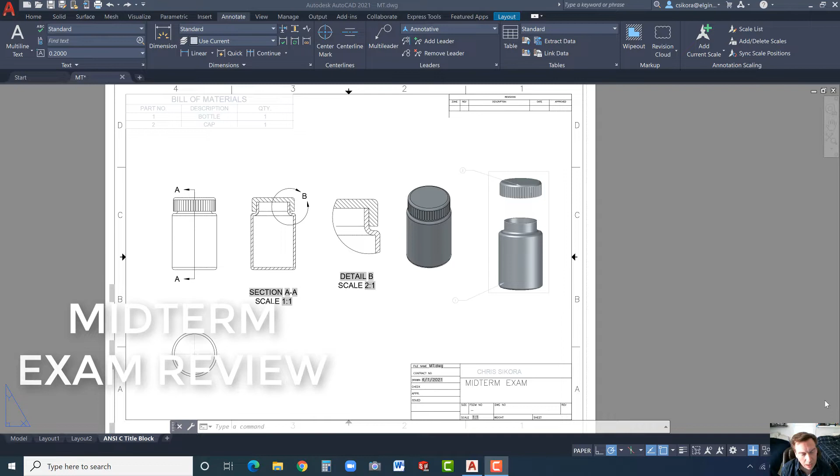So it's a review for the midterm exam. What I ask is that you use it to practice as much as you like, but when you take the exam, don't cheat yourself. Actually do it on your own after perhaps watching this.

This information can be found if you go to Vertanu 1, V-E-R-T-A-N as in Nancy U-X 1, and go to the exams. I would grab the Inventor Basics midterm. There probably will be an AutoCAD midterm up there someday, but for right now you could just use this because it's basically the same thing.

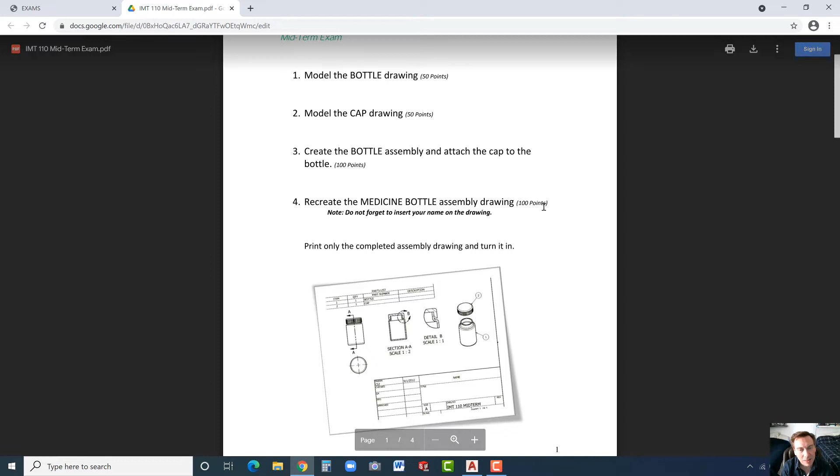There are some instructions, and quite honestly the instructions can still be used because they're very basic, but they do give you the points for each component as well as the part or the assembly and the drawing. And this is our goal ultimately, is to make that drawing, or what you saw earlier.

Now here are the parts. This is not something you have to make a drawing of, but you have to make the part and model it up. So it's a bottle. It's 2.5 inches in height for the bulk of it. The neck is another additional half inch. And it's 2 inches in diameter, and the neck is only 1.5 inches in diameter.

There's going to be some fillets we're going to put on to smooth out the sides, and then we're going to shell it out at 100 thousandths. So 0.1 for the typical fillet, 0.1 for the typical wall.

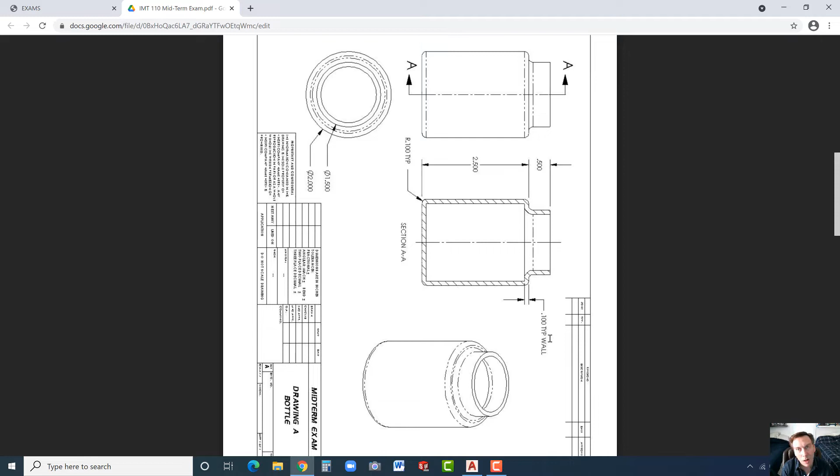The cap is a little more complex. As you can see here, we have a couple stair steps. We're actually going to build it on the bottle to utilize some of the geometry from that, because the neck is the same size as the hole.

Now here we have the neck, or I should say the hole is only going to go 0.4 deep. And then there's this additional 100 thousandths thickness, and then there's a cap on the top of that that's 1.9 in diameter, and it's 0.1 as well.

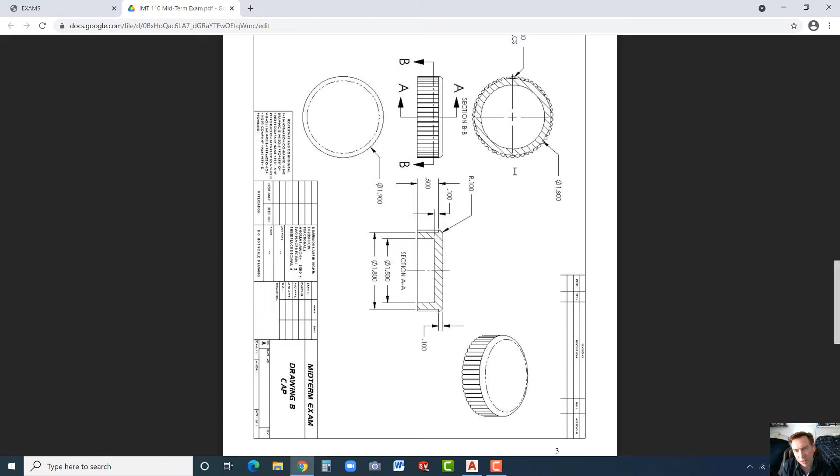And so then we're going to put this array of circular diameters. Let's see here, they're 0.1 diameter. I tried to keep the numbers really easy, so you could just almost do this in your sleep once you've practiced a couple times. And ultimately there's kind of what we want.

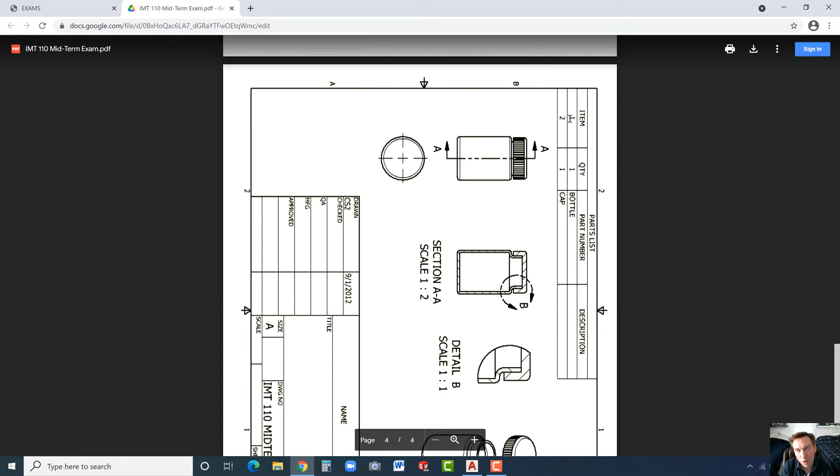We want a front view, bottom view, section view, detail view, isometric view with the balloons and the parts list or bill of materials, whatever we want to call it. And there's going to be a bottle and a cap and so on.

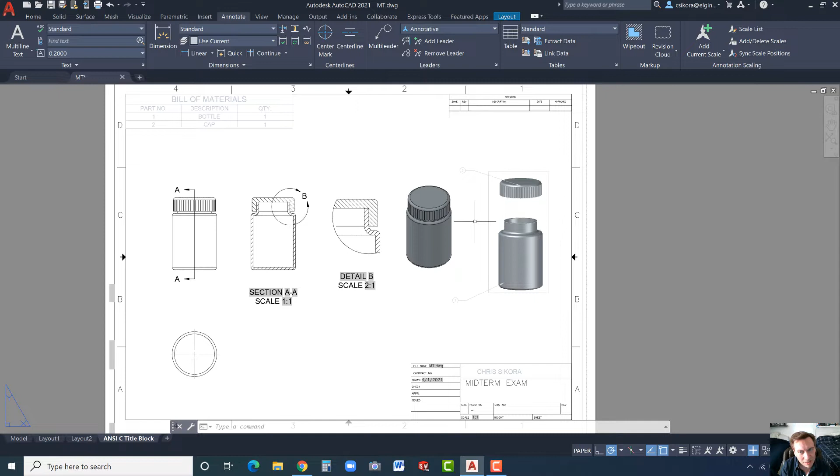Now, the exploded view that you see here is going to be extra credit. You could just bring in this view that I have here if you want. But for 20 points extra credit, I will show you at the very end a technique where you could get this. Now, it's not easy, and that's why I'm giving it extra credit, because I did it a couple times, and several times it came out wrong, and I'm not entirely sure why, but I eventually got it right here, as you can see. So let's begin.

I'm going to start with a new drawing and use the AutoCAD 3D, the one we use all the time, and go to the home button and then top. Now let's proceed. I'd like to actually, once we get home here, go to, I like the 2D wireframe, but it's up to you, whatever you want.

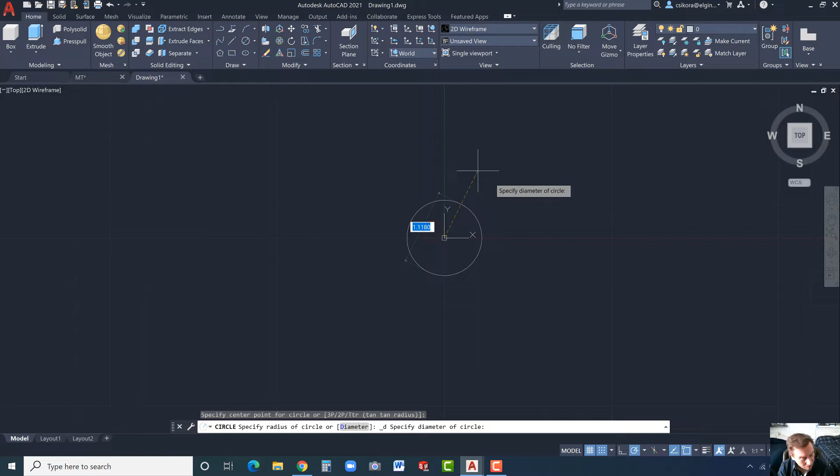Okay, I'm going to turn on the grid snap, and I'm going to proceed to go over here to the center diameter. The bottle we're going to design first, and that's a 2-inch diameter for the main portion of the bottle. So we're going to click on that center point, drag it out, type in 2, hit enter, and then we're going to go back to the home button, and we'll proceed to extrude that.

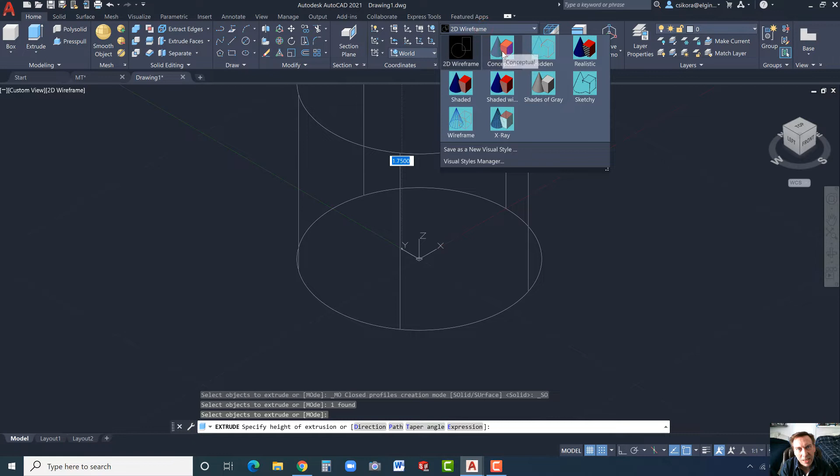So click on extrude, select the geometry, hit enter. It should be able to drag it up. If you like, some of you don't like wireframe, and I get that. I'm going to go with conceptual. Oops, that's making me reset there. Let's go back to extrude. Oh, there we go. Okay, and this should be 2.5.

Zoom up. We could click on this little button right here. That will bring us up closer.

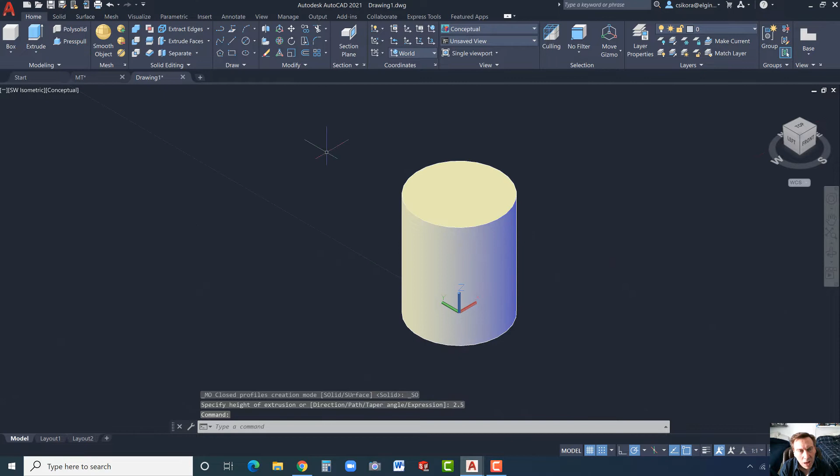Now we're going to go ahead and draw another diameter, centered here on the top. Just click and drag out a circle and make it 1.5. And we could do press pull.

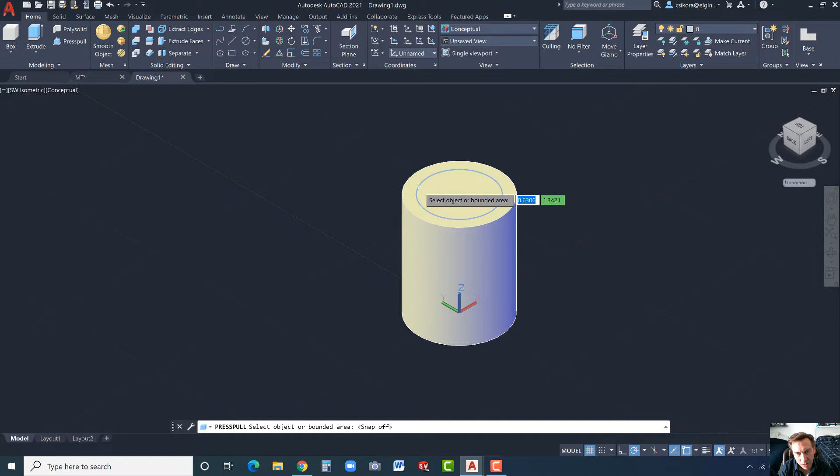Let's go ahead and give it a try. Now I'm going to turn off my snaps. Click inside there, drag it up, and make it 0.5.

Now, one of the advantages that occurs with press pull is that sometimes it could actually merge the two bodies, versus if you use extrude, they're two separate bodies that later have to be united, as we've seen before. In this case, it united them for us automatically, so there was a bit of an advantage for that, to use it that one time.

But I've gotten it where it's not. So just be aware, sometimes if they don't both highlight when you hover over it, it's an indicator that it didn't put them together. It might be due to a sloppy sketch or something, if I've done that before, and I know I have.

All right, now we put the fillets in, and it's very important to do this in order. So fillet edge, radius, and 0.1, enter. Select this edge here.

Select that one there. Now, if you try and click on this edge, it says it can't. That might be because you need to unite this part, and the union is right here. You just click on both of those and click on both of these and hit enter. Then you can try to put the fillet on.

All right, but as you can see, these all worked, and it is important to get these in first. I'm going to hit enter and enter, so enter 2 times, and we have it.

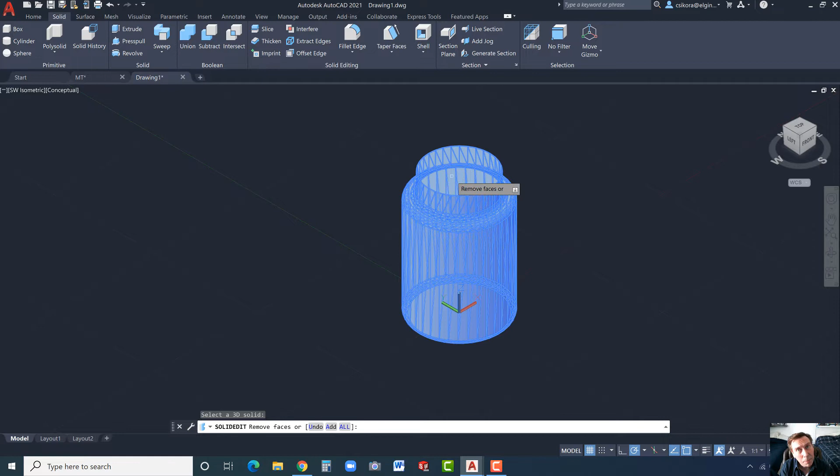Now, the last thing you do is you shell. So go to shell, click on the model, and then click on that top surface, and it should turn white or a different color there. That's the face that's going to be removed.

Hit enter, and now enter 0.1. Enter. And then just hit exit right here, and exit again. All right, there's our bottle. 50 points right there for you.

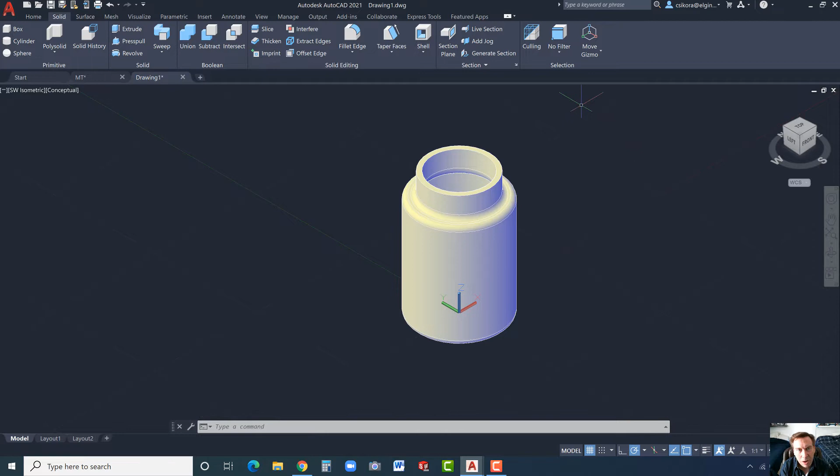Okay, now we're going to move on. Let's go to the home button here, and we're going to proceed to make some different layers. So let's go to layer properties. For an assembly, as we learned with the assemblies exercise, I think that's exercise 5, this is similar to what we did.

Go ahead and click on new up here. We'll call this bottle. And then click on new again. The next one, we'll call it cap, and click on it again. This one is only if you want the extra credit. Put cap 2. All right, and then click off of it.

You can change the colors if you like. It doesn't matter. I'm just going to leave mine all the same. It doesn't really matter to me. Okay, and I'm going to close this.

Now I'm going to select the bottle and place that over here on the bottle layer. Now as I hover over, it'll say, look at that, the color is by layer, and then it says layer is the bottle.

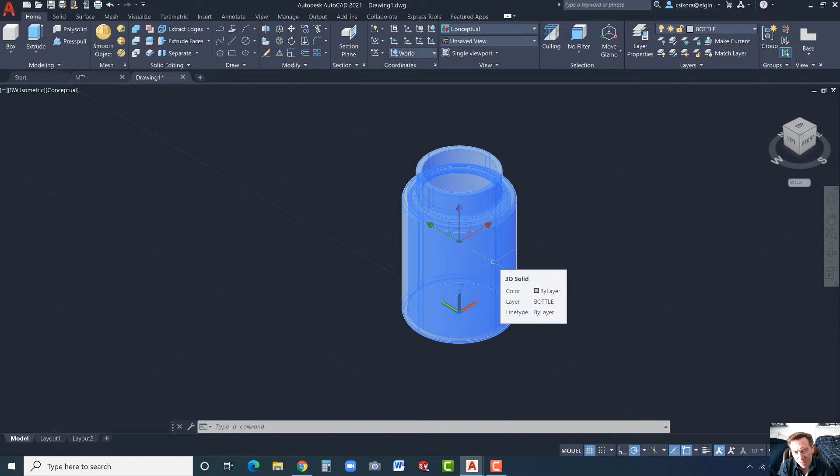Now, what we're going to do next is we're going to go ahead and model the cap. For the cap, we're going to model it literally on the bottle. So what we're going to do here is let's go to the diameter, center diameter, hover over this edge, and we're looking to get the center point. There it is. I had to hover over the edge of the neck of the bottle to get this center point. I'm going to click and drag this out.

Now this first one is going to be 1.8 in diameter. And proceed to extrude that.

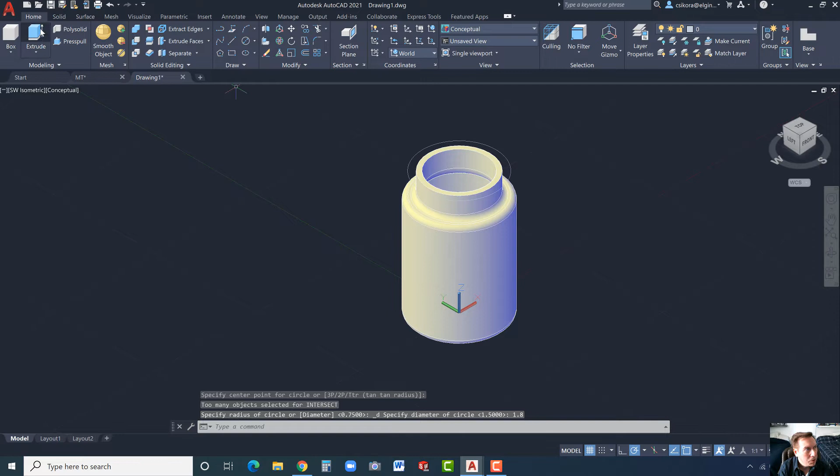Click on it, and notice I picked extrude. I didn't pick press pull because it might actually merge or unite with the bottle, and we want them separate volumes. So anyhow, I went with extrude, hit enter, drag that up, and it's only 0.1 for the height.

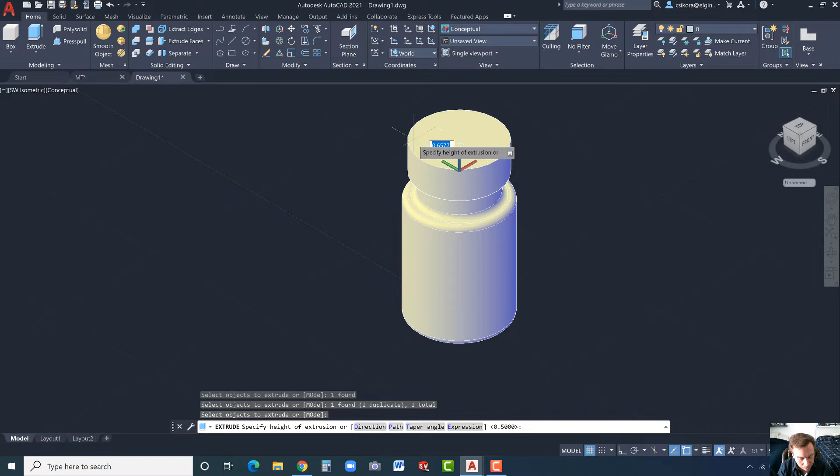Now let's go back to circle, center diameter. Hover over this until you get that top. Let's see... okay, there we go, now we see it appear.

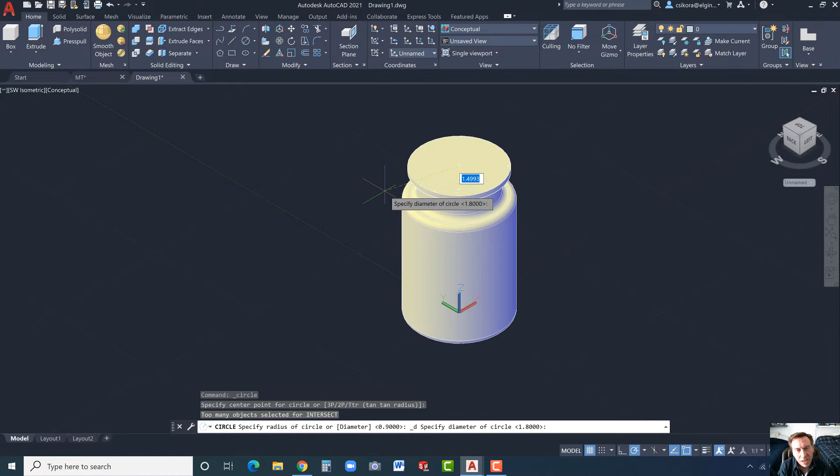Click, drag out another circle, 1.9 this time. I think even if I use press pull, because it overlaps, it comes out as separate. But let's give it a... no, we better go with extrude, I just thought it might confuse some of you. So let's go with extrude and select that outer edge, hit enter, and this is 0.1 for the height.

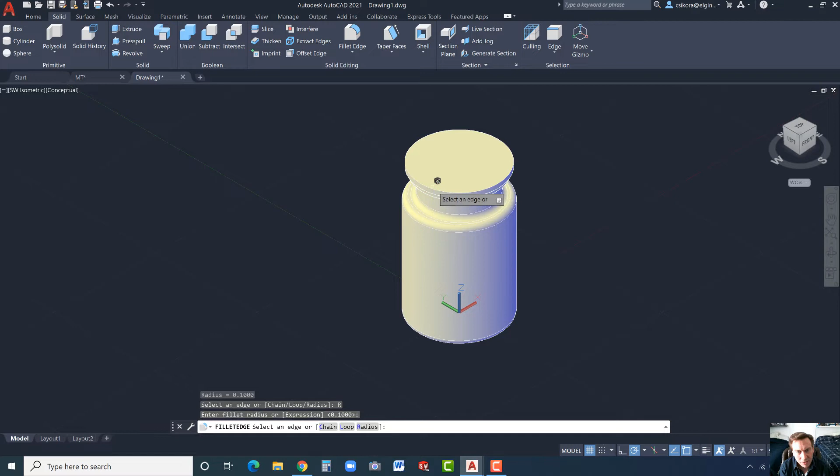Now immediately I would recommend to put the fillet on. The number one thing on this test that's missed is the fillet, so that's 20 points if you miss it. Make sure you add it: go to fillet, go to radius, it's already 0.1 so we're in good shape. Hit enter, select that edge, and hit enter, enter.

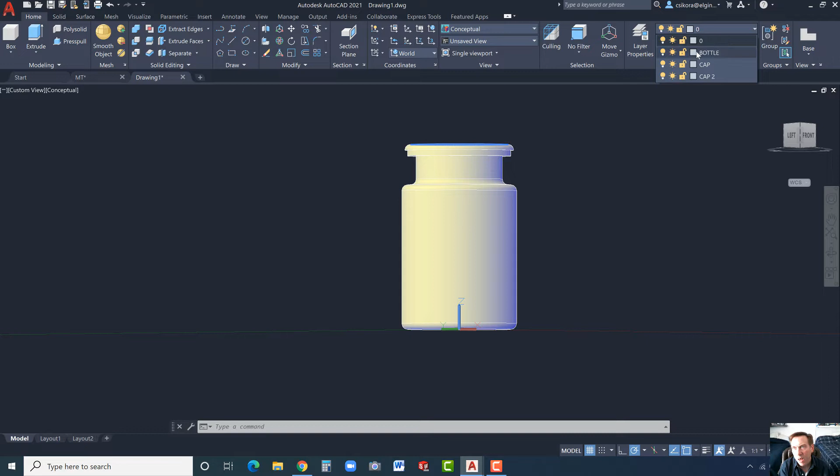All right, now we want to merge those two as well. Let's go home, and go over here to the bottle and hide the bottle. Okay, now click over here and let's rotate it around.

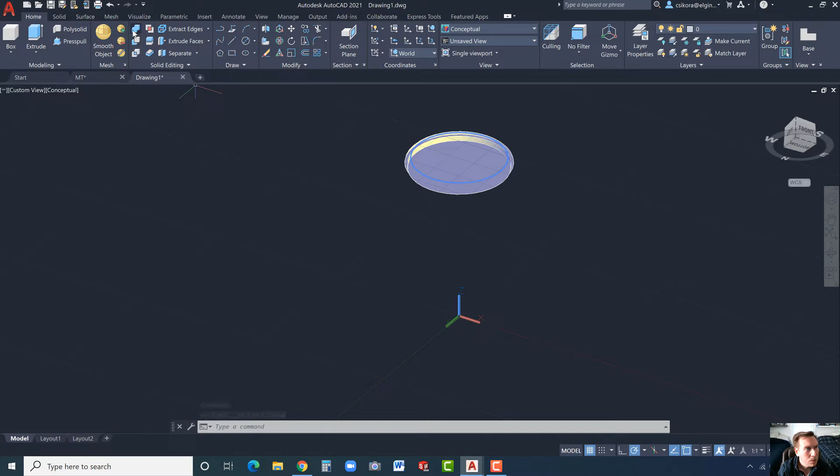Now what we need to do is make the next diameter here, a couple diameters. And you know what, we could actually delete this one, we don't really need that anymore. Okay, let's first merge those—so unite them. Go to union, select this, select that, hit enter. So now they're one.

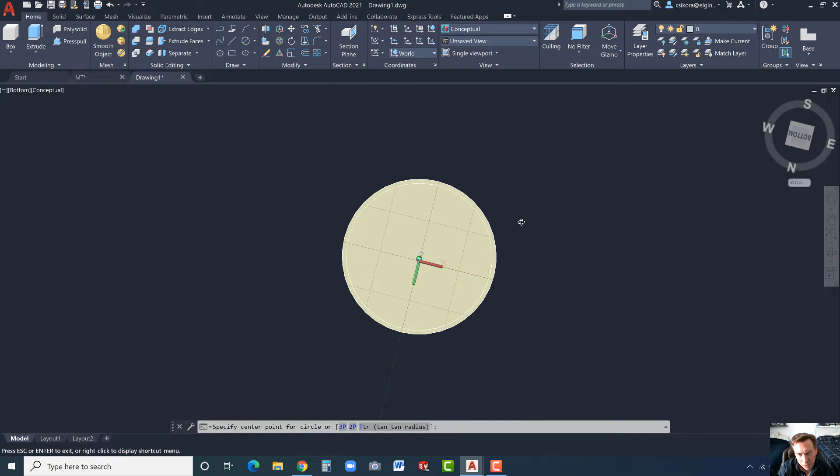Now let's go to the bottom and go to circle, the diameter. Let's hover over the edge here to wake up the center. Oh, it's not doing it for us. Let's get... come on. All right, we're just going to rotate it a little bit—shift and middle wheel.

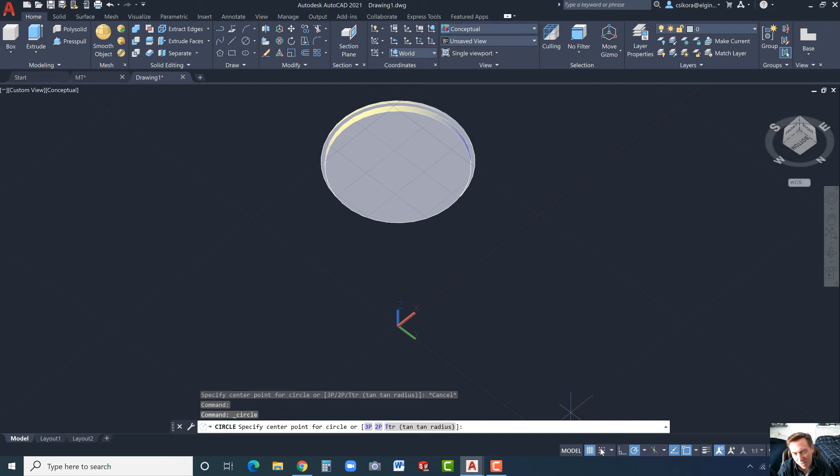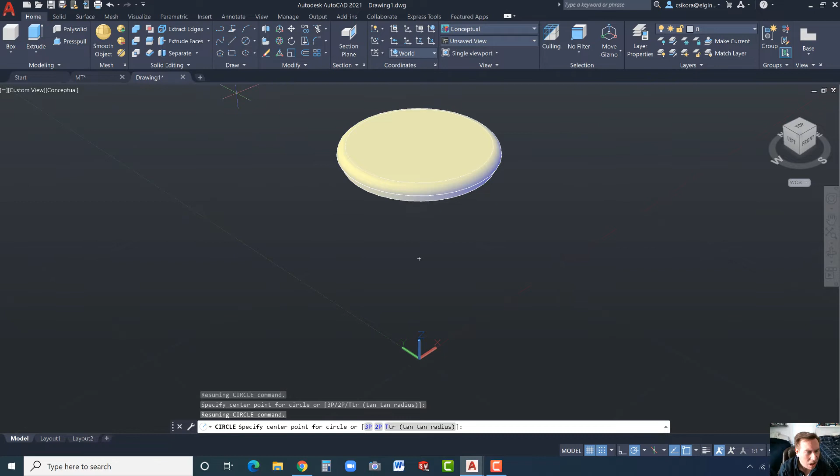Okay, maybe we'll get a better highlight there. I think we've got it. Come on. All right, that's okay, let's turn on the grid. Because it is centered, we should be able to get it centered. Is that centered? Let's go back to bottom. Interesting, it still doesn't want to. Okay, so what we're going to do is steal the edges of the 1.8 because we need that anyhow. Or, no, you know what, yeah, we could go ahead and do that, I suppose—we could press pull.

Let's click on the bottom, drag it down, and we want it to go down 0.4. Now let's try and put the neck of the bottle in here, and turn off your snap. Okay, and there it is. Click, and that time it worked really well.

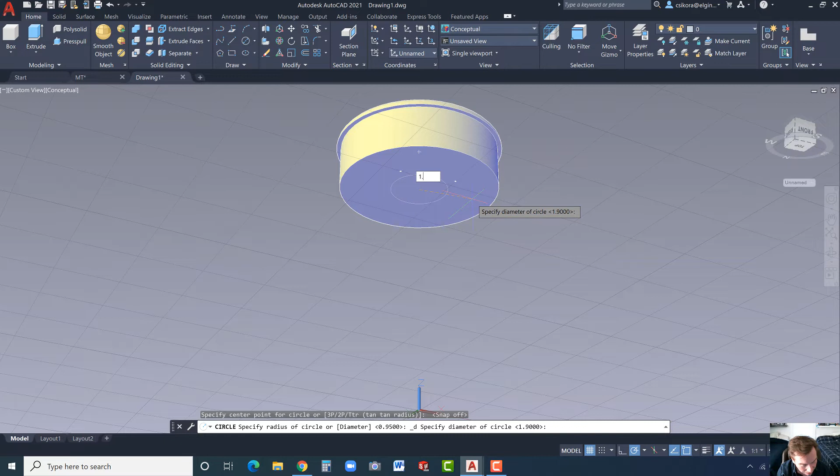So now we want 1.5, and we could actually use Presspull again. Click on that, drag it up 0.4. My original plan was to have an outline and just extrude it down so we didn't have to do that step, but that's okay, we still got to the same result.

And I have students ask, like, do I have to do it exactly like you? As long as the geometry is correct, you do it the way you feel is best. Mine are just techniques that I have—there's probably a dozen ways to do this.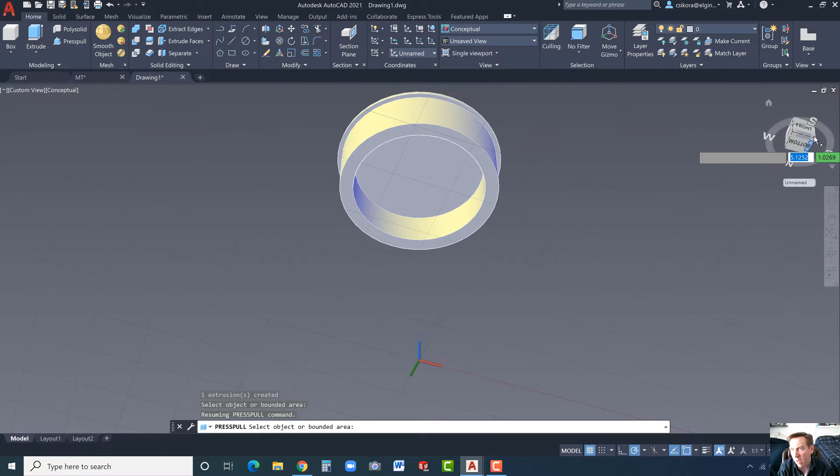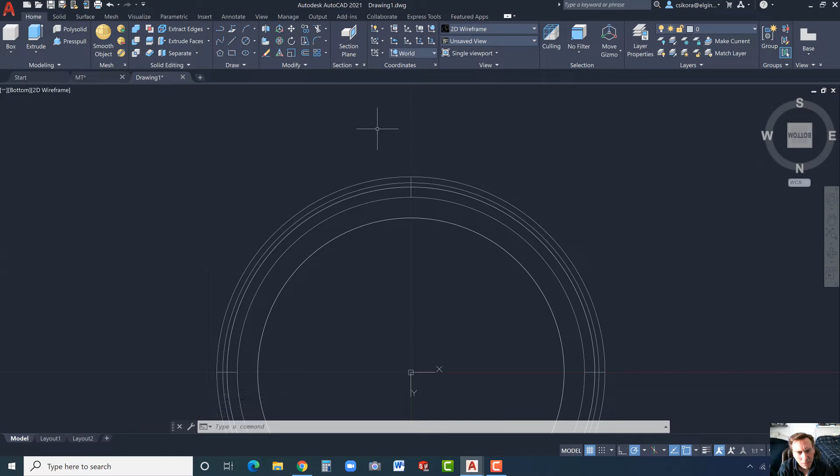Okay, now let's go ahead to the bottom. And I'm actually, sometimes, you know what, I keep forgetting, sometimes wireframe is a little bit easier to navigate, especially when you're clicking on entities. All right, now this next one we want the 1.8. Now I can't see it, let's see. You know what, it's best with shades of gray. Go with bottom—all right, that's better, a little bit easier to see.

Okay, go to the diameter, snap to this quadrant right here. Oh, you know what, we're better off, quite honestly, center radius. Watch this: snap to that quadrant on the second ridge, then snap to this quadrant on the outer ridge. And now it called me a liar. I'm going to Control Z. Let's do that one more time.

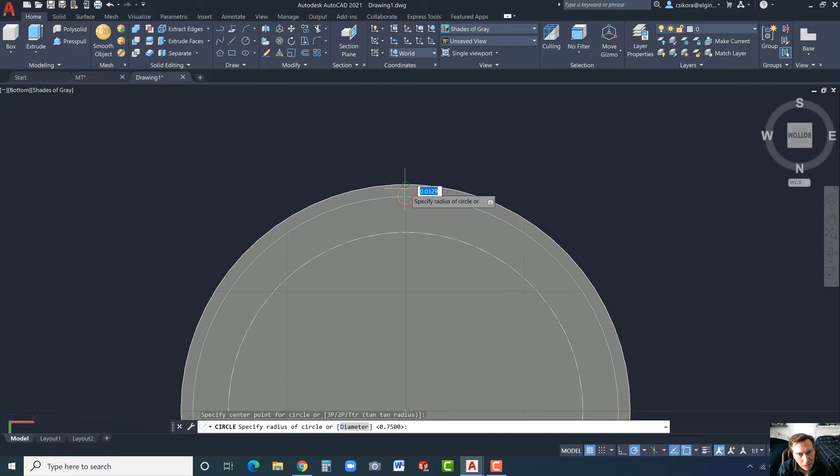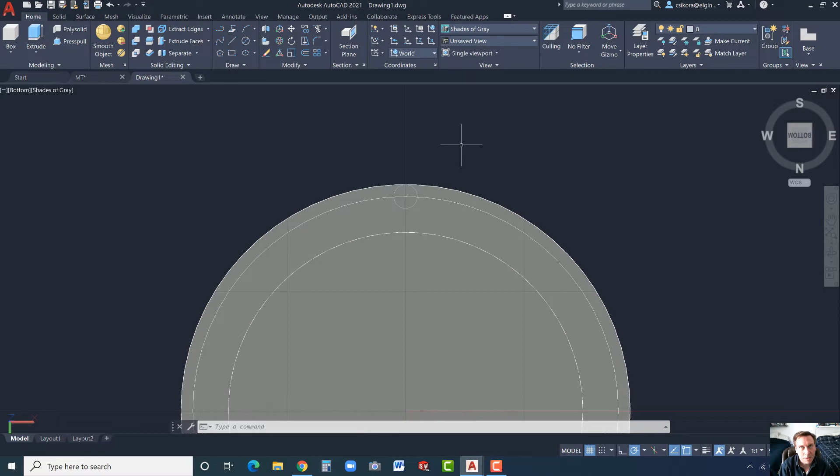I'm just going to make it 0.1 because that's what I know it's supposed to be. And I picked radius, Control Z. I'm leaving in the mistakes because you can actually see the types of mistakes that are made. I'm going to click and draw this out, 0.1—so I went with diameter. My apologies, but I do leave the mistakes in because these are common mistakes that many of you probably might make, and it's good to see how you fix them.

All right, now we could see it's right there. I'm going to go to extrude, select that circle, hit enter, and this is going to go 0.5.

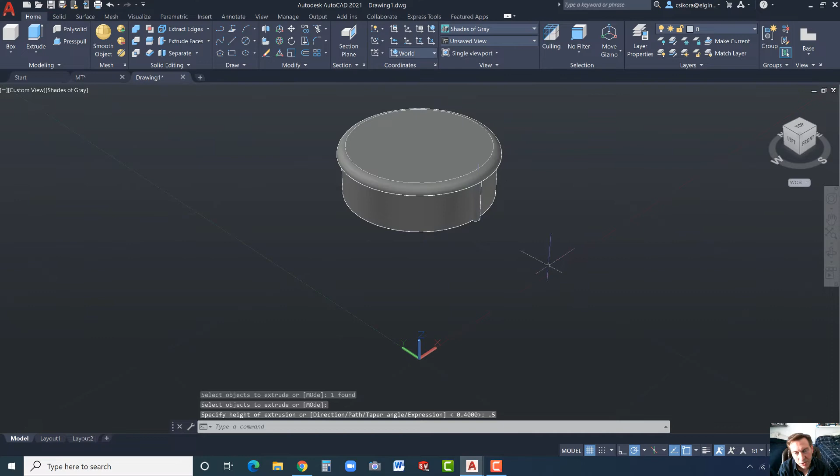That brings it right up to the ridge. Now, if there's a gap there after making a 0.5, somewhere you modeled it incorrectly. So, to be honest, throw it on a different layer, start a new cap if that's the case. You can try and fix it.

This is a partial parametric modeler. The modeler actually isn't parametric, it's the sketches that are parametric. So we're not using that right now. Unfortunately, to edit it, you might be better off, quite honestly, just modeling it again.

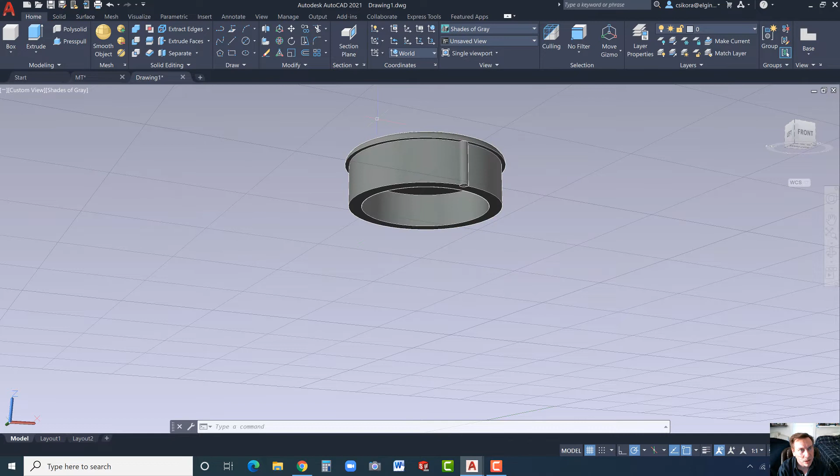Now we're going to go ahead and pattern this. I'm going to go over here to the polar array, select that. Notice I haven't merged them yet, we'll do that after we get this done. Hit enter, and now it's looking for a center point. Click right on that center there. And I'll go up here, and we're going to set it to 50 instances. Hit enter, and then make sure associative is turned off.

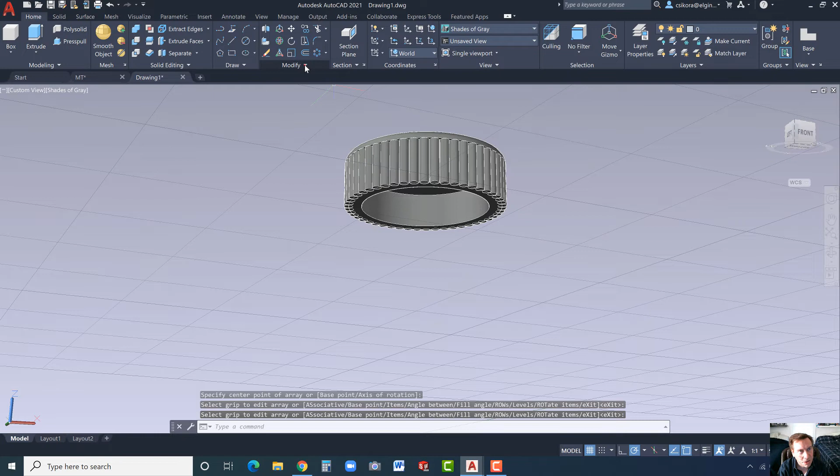Associative, if you leave it on, I've had issues where it doesn't unite with the other bodies easily, so just be aware, make sure you turn that off. Otherwise you have to explode it. If you didn't turn that off, you have to use this right here, explode and select it, and it'll explode the array. It keeps them in position, it's just that you could then select them individually.

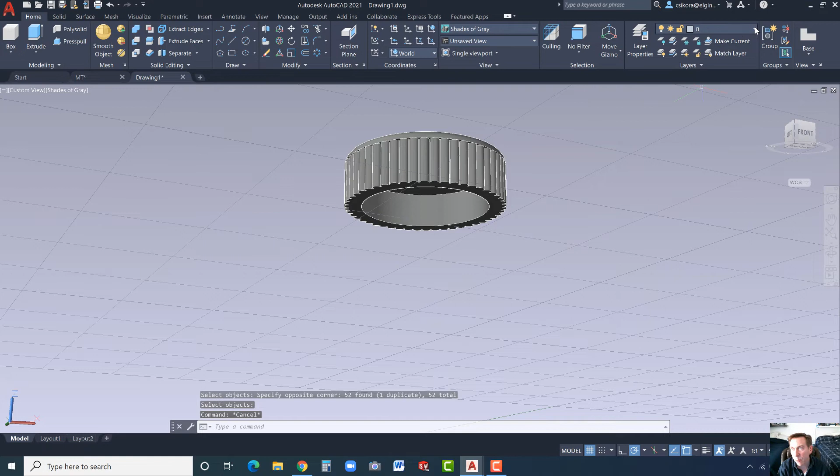All right, now we could go ahead and go over here to Solid Union, click on the cap, and just proceed to click and drag a fence around everything. Hit enter, and we've got our solid. Let's hit escape, and now we could put that, let's select it actually, and we're going to put that on cap. Okay, and go back home.

Escape. All right, let's bring back the bottle, so turn on the light bulb. And now if you zoom out, now again, only if you want the extra credit, do this part. If you don't care about the extra credit, don't worry about it. It's 20 points though, it's almost worth as much as a full exercise. Not quite, exercises are worth 30, so 20 is not bad though.

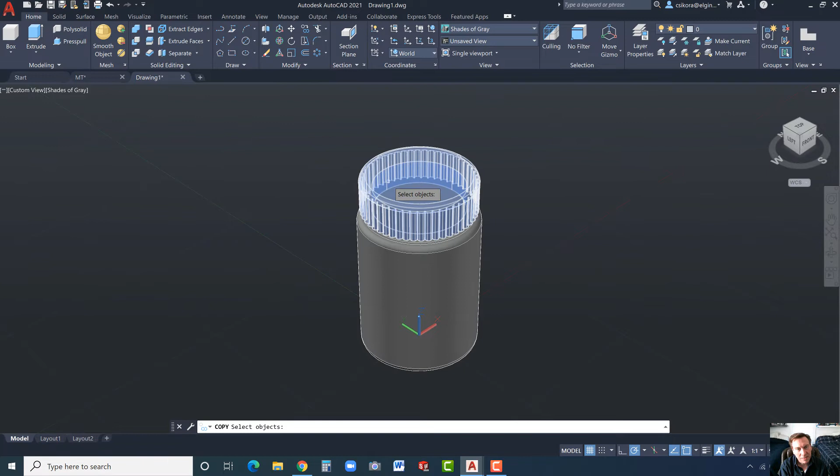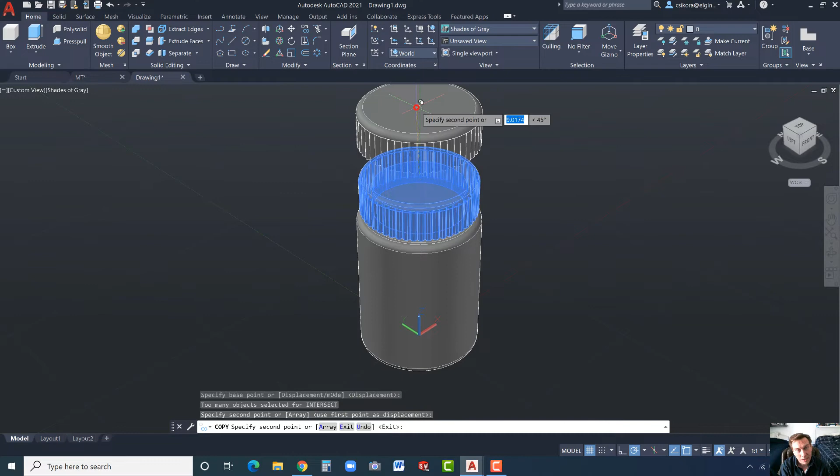All right, so we're going to go over here to copy. Now I'm going to go ahead and select the cap, enter, and then I want to move it. Select that, you could drag it up and get it to maybe about just over an inch away, like mine's 1.1. You could type in a value if you want, click, and then hit escape. Now make sure you drag it straight so it's directly above it.

Now, guess what we're going to do with that? Click on that, set that to cap 2. And since now that's set on cap 2, click on this and turn off cap 2, hide it. Now let's save what we have. Actually go to File, Save As, and I'm going to drop mine on my desktop. And we'll go ahead and give this a name, just MT for midterm.

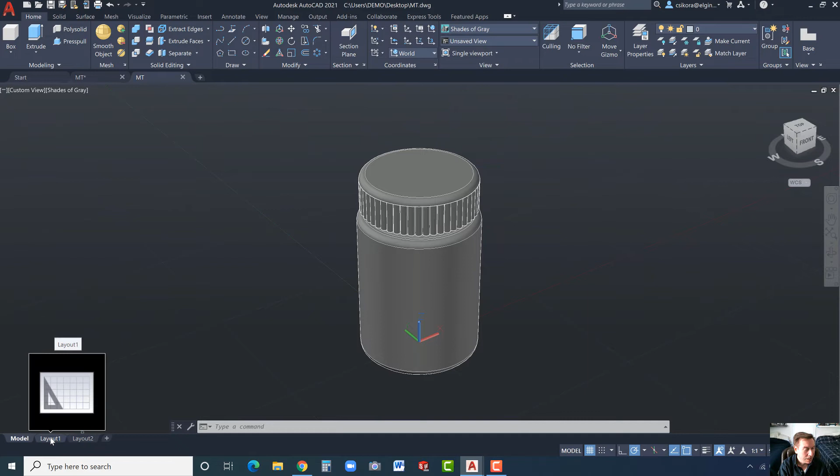Okay, now we're going to go ahead and make the drawing. So to move on to that part, right-click on Layout 1, from Template. We're going to use one that's already in there, so the sheet sets, and everyone has this, Manufacturing Imperial. And it's a C size, so that's okay. Hit Open, and you'll see right there, ANSI C size, hit OK.

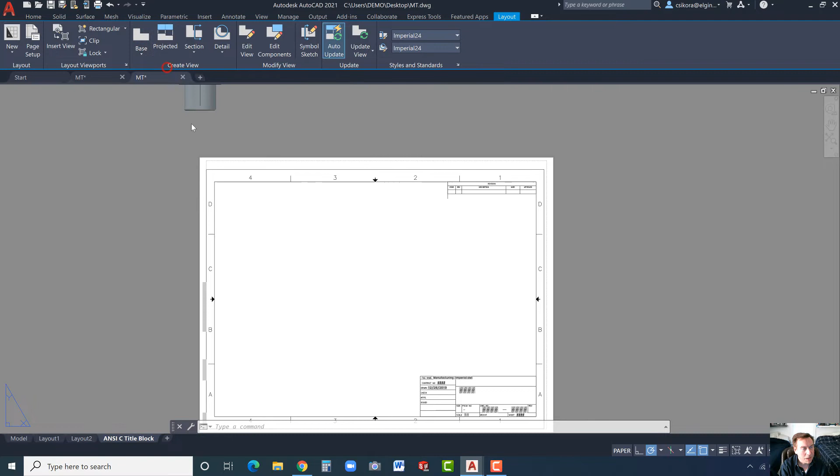All right, now it should appear down below here, so click on that. And let's zoom up a little closer. Now we could start dropping in. You're going to have to go to the Layout tab, go to Base, Model Space. Click right about there. And the orientation is good.

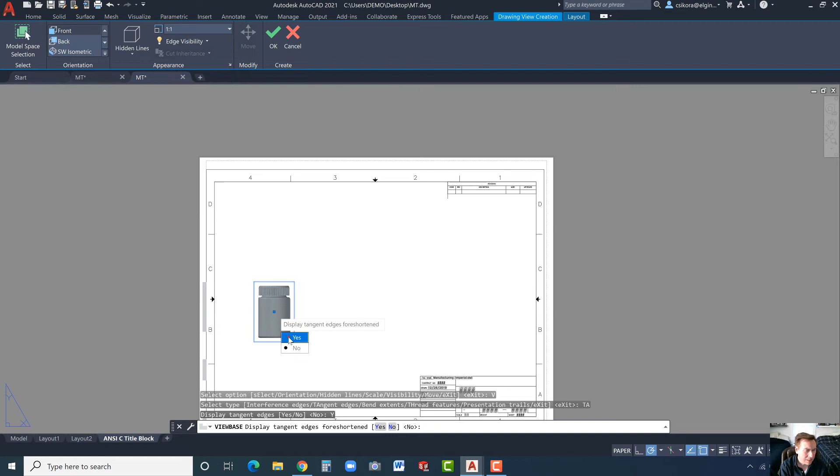Let's go to Hidden Lines. And just visible lines we want. And scale looks pretty good, we'll leave it at the scale that it's given us. And visibility, let's turn on tangent edges. Yes. Do you want it foreshortened? I like them foreshortened sometimes, let's go ahead and select yes. And now hit exit, and exit again.

Now drop one down below. And go ahead and drop one up here in the upper right, the isometric. Click.

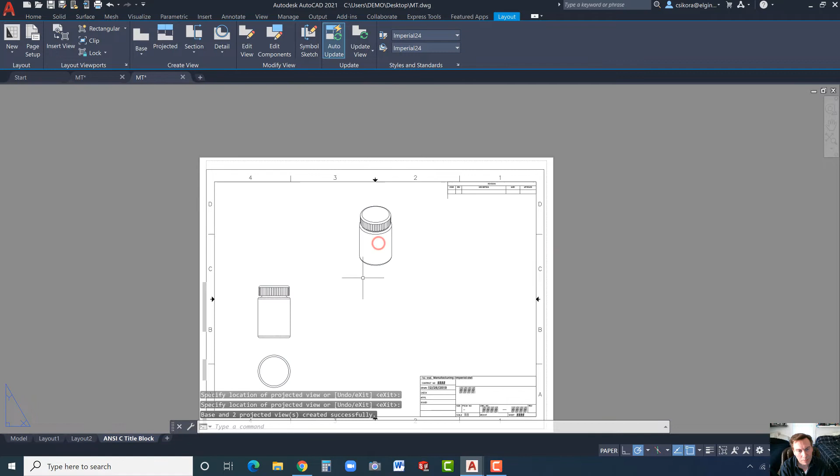Now you right click and enter, and there they are. You could double click on this one here, go to hidden lines and shaded with visible lines, and then exit. Okay, so there's our shaded view.

Note that shaded views aren't always acceptable for every view, so be careful. For portfolio, I actually did some with shaded because I thought they looked cool, but some companies don't like it, it shows a sign that you don't really work in industry. So I don't think I'd recommend it. Do it similar to what we're doing here and you should be fine.

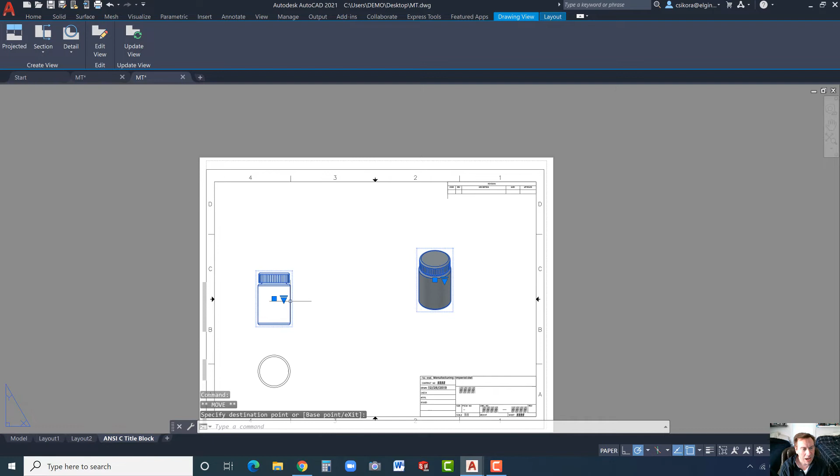Okay, now I'm gonna move this up a little bit. Just as a general note, I don't know if I showed this in the last one, I don't think we did it last time with assemblies. If you click on this, it gives you all the different scales you could pick from. We're going to leave it as is, it's set to 1:1, which is fine.

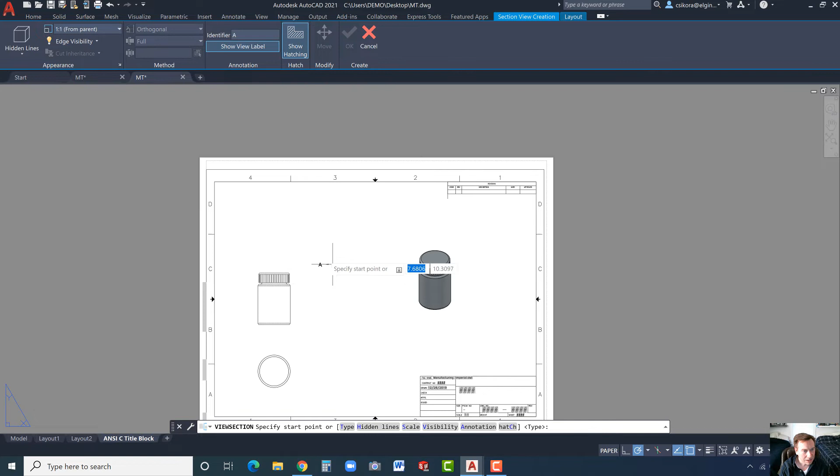Okay, now click one time on that view, go to section, go to the bottom and hover over that midpoint, then move down a little bit below it. Click and drag it straight through, a little bit above it, click, and now right click and enter. Drag this off to the right here, click, and just hit exit. All right, there's our section view.

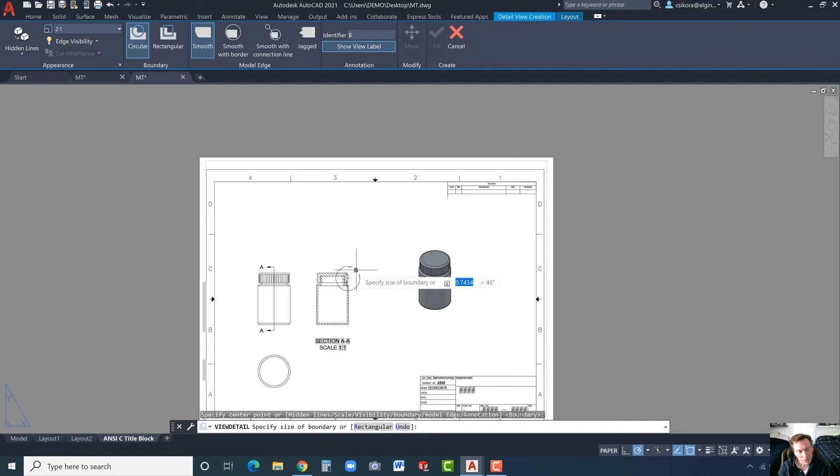Let's do a detail view now. I like to pre-select the views, it just seems a little smoother when you do that. Go to detail, and right over here we're going to click, drag out the circle so the B is outside of the part, click, and let's drop that right about there and just hit exit.

All right, now for the bill of materials - and like I said last time, I'll show you the exploded view. Okay, now the bill of materials.

Now we have to make it manually in here. There might be a way to link them - I bet you there's somehow to make a smart one, but I don't know about that. Someone feel free to post a link down below if you have a video that does it. Anyhow, I'm going to show you how to make one here.

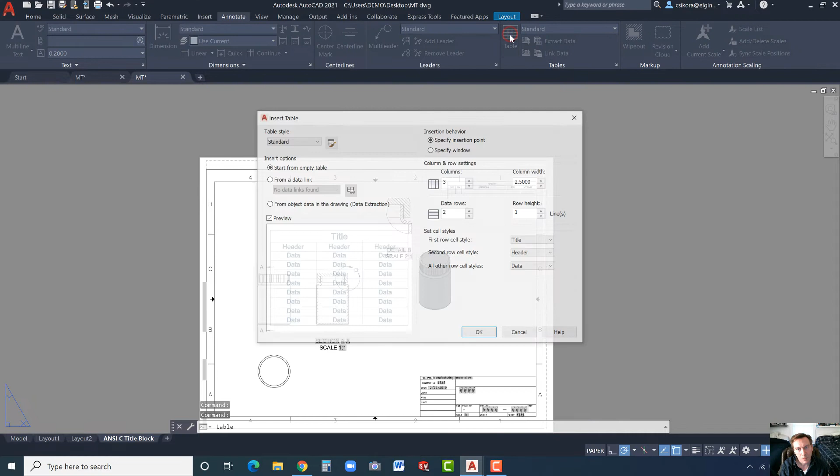So let's go to annotate, and we see table. All right, for the table, start from empty table, preview, and the columns should be 3, column width 2.5 is fine.

Data rows 2, because we only have 2 parts, and row height 1 is fine. We're in good shape here. Just make sure that those all match mine and hit OK.

And I'll just drop that up here. When it snaps that corner, you're in good shape. Now right away it starts flashing, it wants us to drop in something. We could call this parts list.

Okay, then click in the next cell, double click in there, and with justification - let's see, that's not letting me - I'm just going to do, oh, it's already at middle and center. Okay, make sure it's at middle and center.

And this one is going to be called, let's see, part number. Okay, now click in this next cell, double click in it, and this one's going to be description. And then double click in this one here, and this will be the quantity, QTY period.

Okay, now this is the one - oh, it actually is set, the justification is... oh no, see, look at this, justification switched. So make sure you select middle center. And in this case, we're going to type in part number 1.

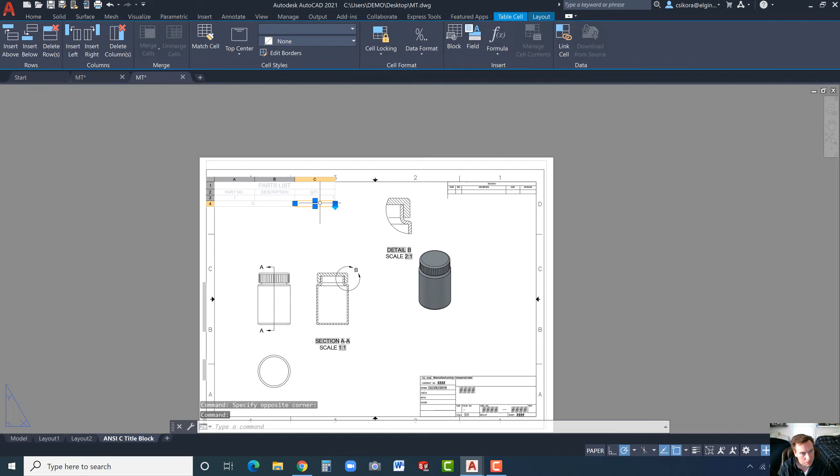All right, now quantity - I'm going to go over here, double click in there, Control V, double click in here, Control V. And interestingly enough, this one did not pick up my justification, so I'm going to have to go back to justify middle center. Oh, nor did this one. Interesting, so that one too.

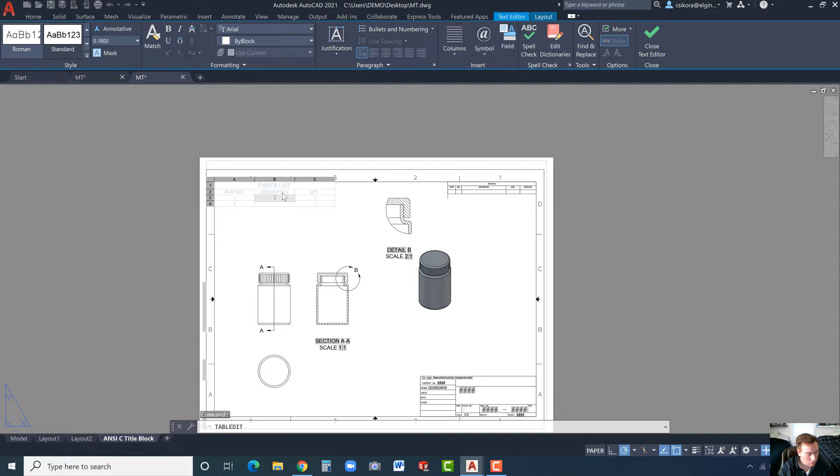And we could set this up - I believe there was an option for it in the settings and I just didn't do it. But anyhow, okay, now description: part number 1 will be the bottle, and part number 2 will be the cap. And capital letters should be used. All right, so we have that set.

Let's move this over a little bit more. And maybe move this over too.

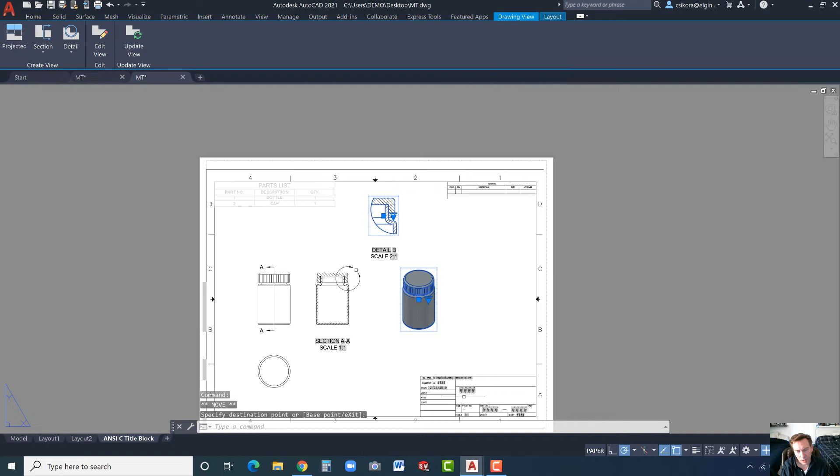Okay, now let's make some alterations over here. Double click on the text. I hit escape—for some strange reason that comes up the first time I double click, then I hit escape. I double click again, and I get this. This is what I'm looking for.

Anywhere you see hash marks, like the sheet name, click on that—down here I'm actually going to put in midterm. Apply. I'm going to scroll up. There's more hash marks, enter sheet number.

You could just delete that. And then go over here to sheet number, wipe that out. Again, anywhere there's hash marks, let's go down and see what else we have here. And then the manufacturing check date.

Let's get rid of that. Okay, and finally there should be a contract number—we don't need that, of course. Let's get rid of this.

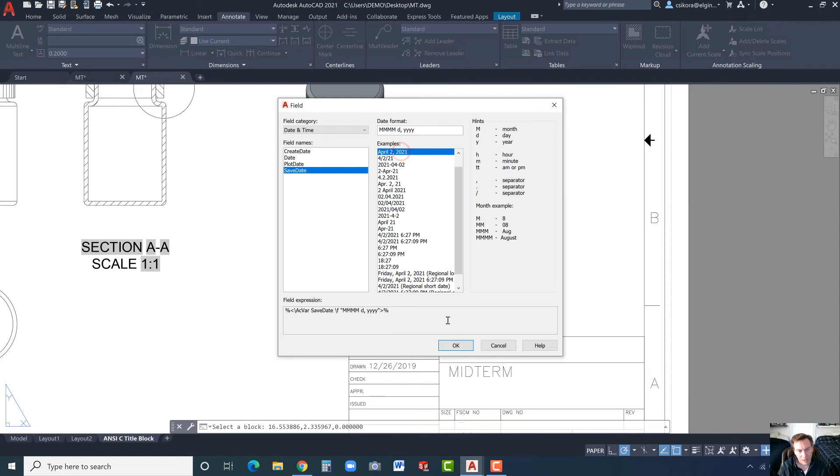Okay, and the date—I've had it where it actually puts the date in correctly. Let's see, we want drawn date. Let's come up with a revision date there. That's not what I was looking for. But there we have April 2nd. Hit OK, and apply it. There we go.

It didn't do it—don't worry about that so much. I just wanted to make sure you had that one. I'm not too concerned about the date, but you can tinker around with it if you want.

Okay, so now we need to put in some text. Go to multiline text, and let's make it match—this, I believe, is the one it's using. Let's go ahead and plop it in right there. Oh, that's really big.

Okay, I'm going to put in Chris S., and then click off of it. I'd like you, those of you in my class, to put your full name in it, because remember we have a lot of similar names. I teach over 100 students a semester, so just in case, I'd like you to do that.

All right, now we need the center mark here, so don't forget the center mark. Click on center mark up there, and select this edge, and we're in good shape.

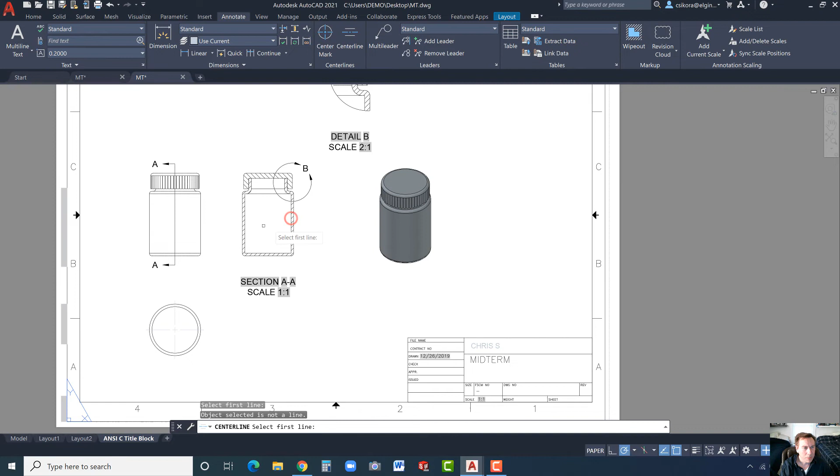Okay, now this is all you need. Those of you who want just an A, full 100% credit, you could at this time do an export out—like you go here to export PDF and go ahead and export that out. You should be able to get it.

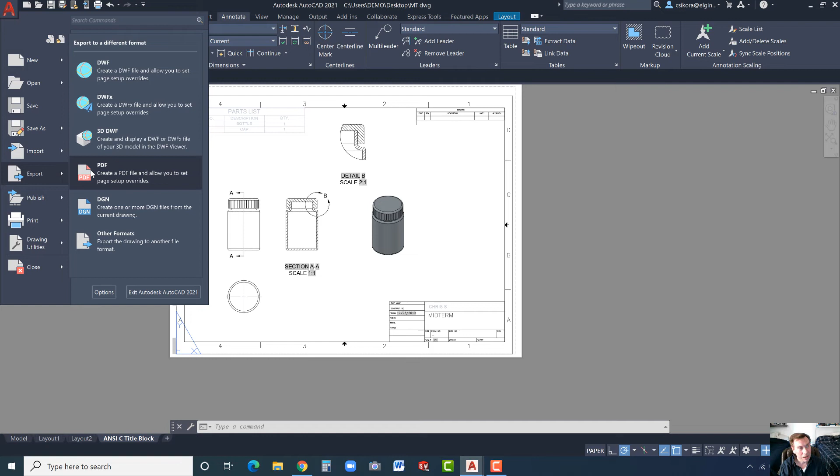Another thing you could do is an Alt print screen on your keyboard and paste that into a Word document. Make sure it's big enough that I can see it, so you might want to rotate it 90 degrees so it appears in the Word document on 8.5 by 11. That's fine too, and send that to me. Try and save them as PDF so it's nice in a compressed format, and it's easily opened, easily edited.

Okay, but now I want to show you for the 20 extra credit points. Here we go, let's cross our fingers because I've had it fail on me before. Now what we're going to do is go Layout, and Insert View. All right, now notice it brings us back here.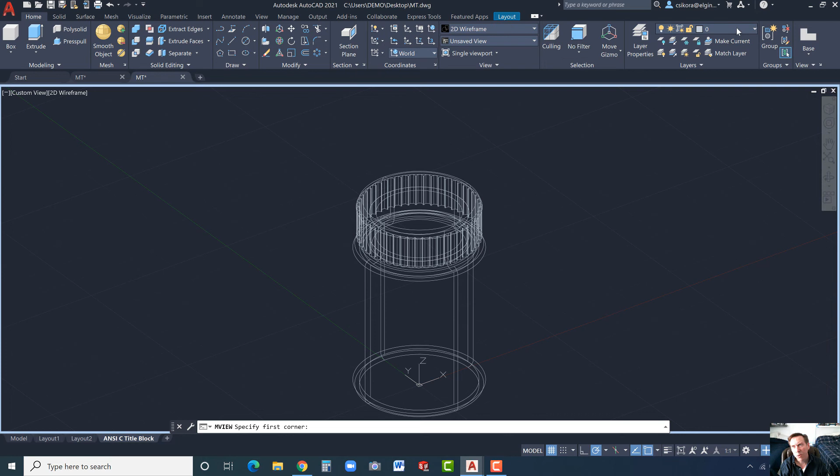Okay, that's fine. What we want to do is go Home, and instead of 2D wireframe—I'll leave it 2D wireframe, I'm sorry. Go to the Layers and activate Cap 2, but deactivate the cap, so turn off the cap. And so now it looks like it's hovering above it.

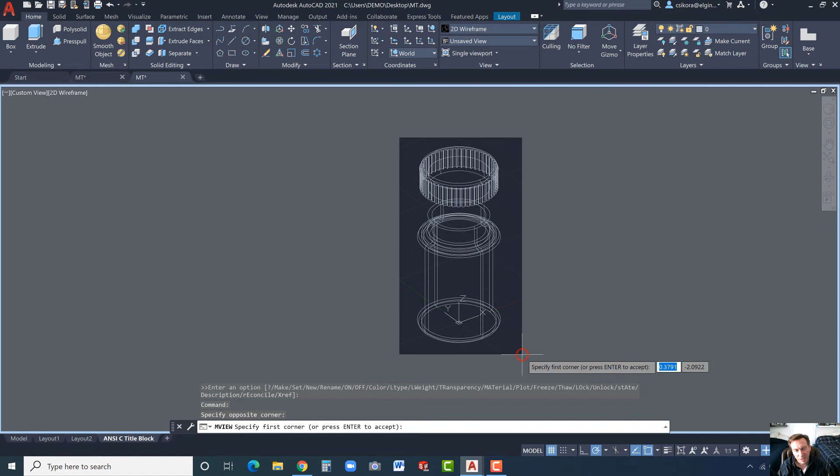Now you can zoom out, click up here, and click and surround it with a rectangle. Try and get it in as tight as you can. Click again, and hit Enter. And it brings us back here. Fit that rectangle right there.

And I know you're thinking, hey, that looks kind of funny. Now watch this, double click. Oh, darn it—and look at that, it popped the cap off the top. I've had this happen before. I don't know how, sometimes it happens, sometimes it doesn't. Not sure why, but I'll try and fix that.

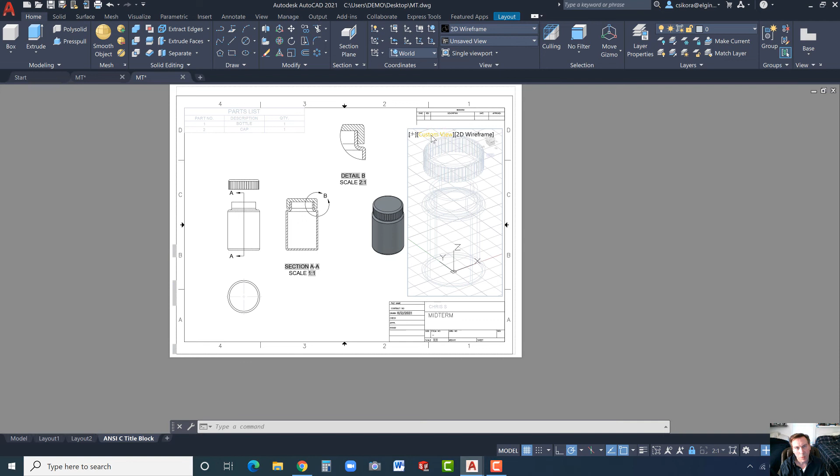So under here, first of all, Custom View. Actually, let's go to 2D wireframe. And you should be able to double click.

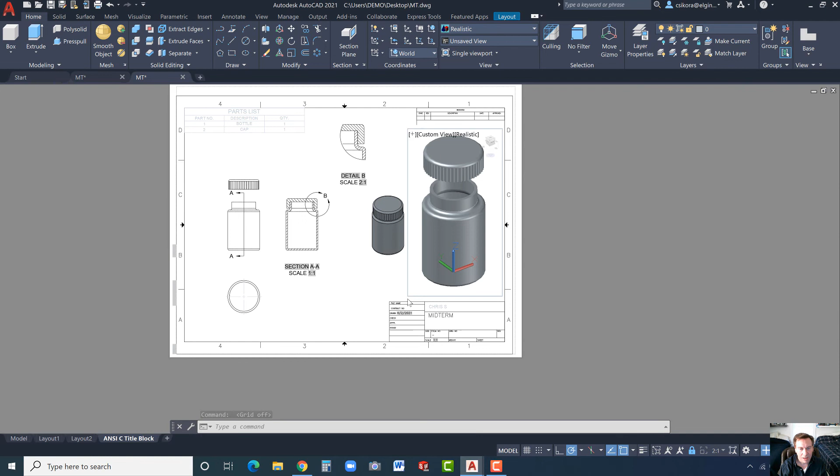Well, all right, we're going to go with Realistic. There's Realistic. And we could leave the grid on, but I'd prefer you to turn it off. So go down here, turn off the grid. It just looks a lot better.

And you could click off of it. Now you'll see you could change the scale. Go over here, and let's make it a 1:1, just like the other one next to it. And there it is. Now, interestingly enough, this one has had some bizarre effect, but that's okay.

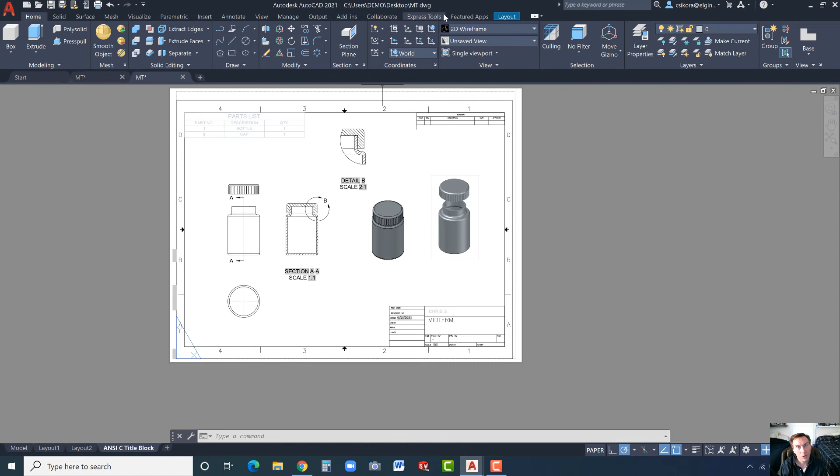Now what I want to show you is how to put the notes in here. So the balloons, we want bill of material balloons. So over here, we're going to go to Layout—oh, actually Annotate. And instead of Standard, I want you to go with Annotative.

And go over here to the leaders, and we're going to set it up for Annotative. Go to Modify. And we're going to, for content, we want actually instead of, let's see here, that's all fine, blocks... and I'm not seeing what I'm looking for. Let's see here, did I miss it?

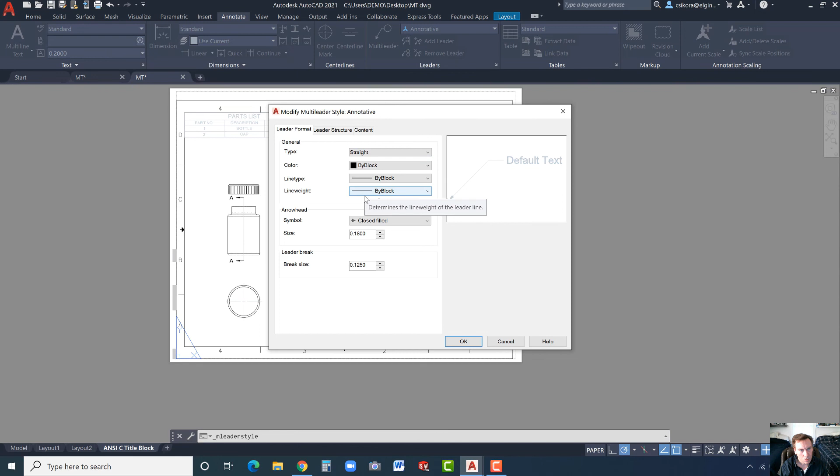Okay. And for some reason, I'm drawing a blank. I cannot find what I'm looking for. If someone notices it, I'll try and put it up there, as I know I've found it before. We're basically just trying to get a balloon around our bubble here. And for some odd reason, I'm just not seeing it today.

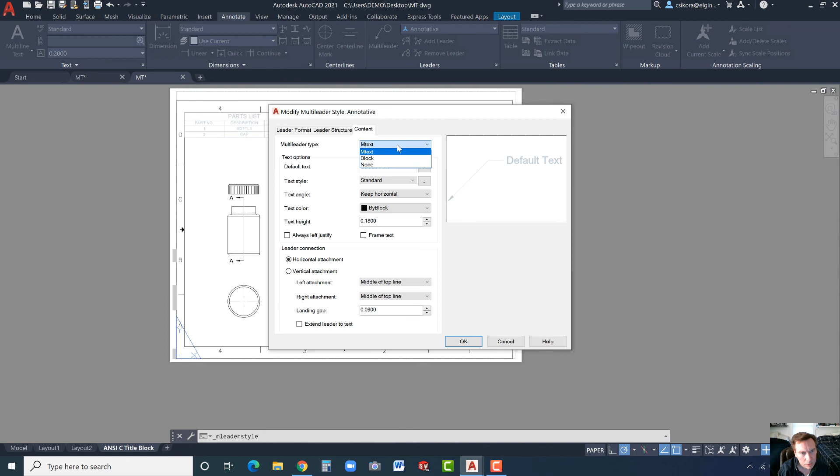Text height, style. There we go. Okay, go to Block, Detail Callout. We want Circle, and we look good here. I think we're in good shape. Okay, so now we could go ahead, set Current, and Close.

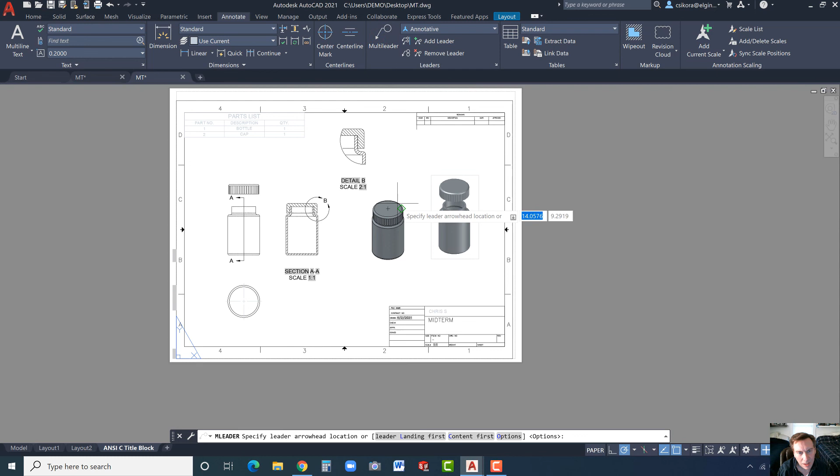Now when we go to Multi-Leader here, I'm going to do it on here because it seems to work better for right now, but you can do it on the Exploded View, and that's preferable. You click, drop that off, and now this is the cap, and the cap was part number 2, remember, so just type in 2 and hit OK.

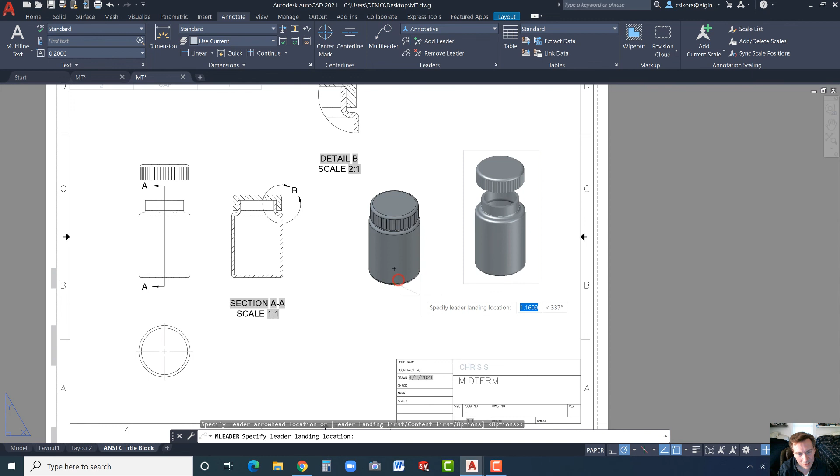And where did it go? Let's try that again. Okay, so today I'm having some difficulty with that. Not entirely certain why this is having trouble. Let's hit okay—apparently you have to hit Enter afterwards, and I just forgot that.

Let's try that again. Multi-leader, click. This is 2, Enter, and then OK. All right, it's calling me a liar today. Anyhow, if you have difficulty with that, go ahead and just send me the best you can and tell me when I grade it that it was doing this, because if it happens to me, I want to be fair. If it happens to me, I'm not going to knock you on it.

Okay, I'm going to try it on this now, and you'll see this one is a little quirky too from time to time. Click, drop that off. That one is going to be 1. Enter. Okay, that one worked just fine. Let's try it again.

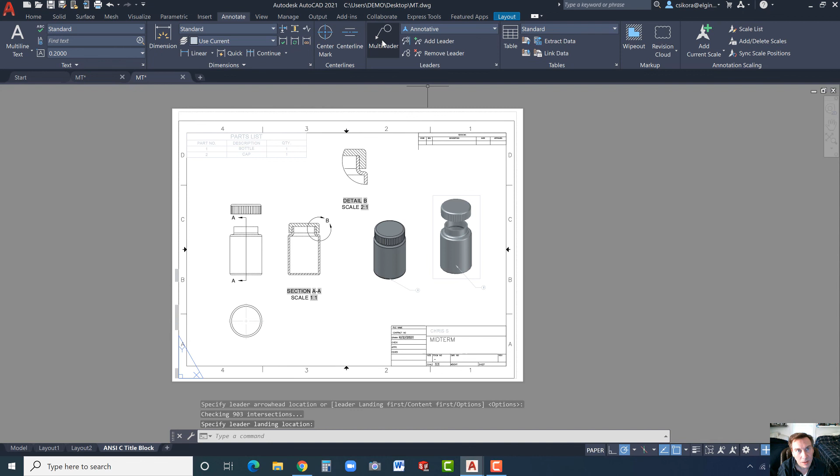And sometimes you have to zoom up, and you want to get one of those little triangles to appear. Click, drag it off, 1, enter. Okay. It's very strange that it's not working on there, but it's possible because, remember, I have that in a hidden state in the layers. So it's possible that's causing a problem there. I bet you that's what it is, in fact.

Now, as far as this one goes, let's see. I'll try and update that view. Perhaps I could get that one to close. It's very strange. I had that happen once, and I did it a couple times.

Anyhow, if you're trying for the extra credit and that happens to you, I'm still going to give you full credit. So I'm going to try and fix this video and figure out what went wrong there. But it's happened before, and then other times it doesn't, so probably operator error on my part.

Anyhow, I hope you enjoyed this test. It is a very good test for figuring out, for learning how to use this software, at least the foundations, the 3D side.

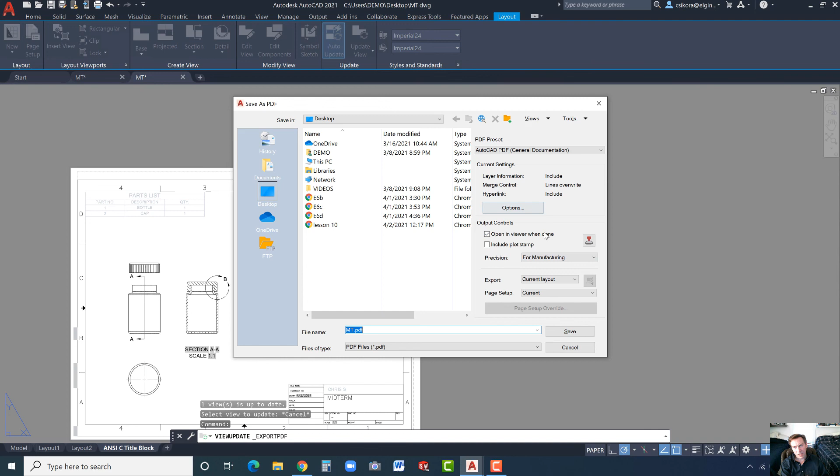And remember, just go ahead to output this. Just go to Export PDF. I'm going to do it right now. And let's see, under Options, the AutoCAD PDF, we're in good shape there. Usually you could just hit Save, and let's see what it comes out to. There it is. Beautiful. All the settings are already there for you, so you don't have to tinker with everything.

Okay, that concludes the midterm exam.